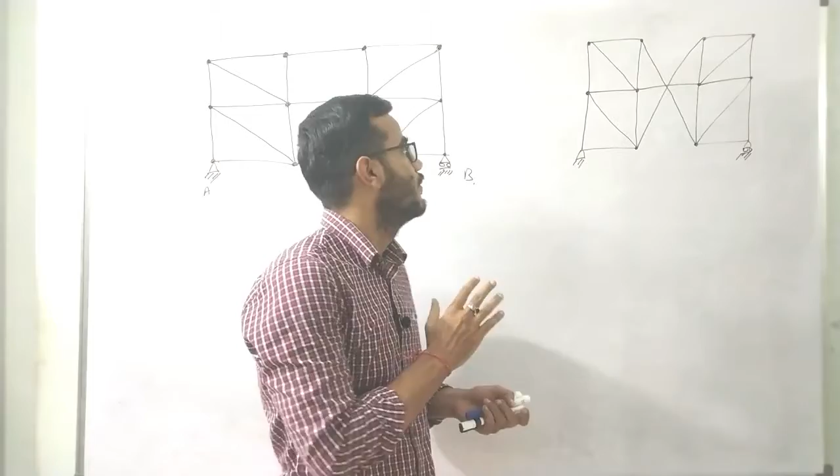So now we'll check the stability of compound frames in case of pin joint structures. Basically we have two problems here of compound frames. This is problem number one. This is problem number two. So why are we calling it a compound frame?

Here we have one pin joint frame, and here is another pin joint frame, and these are connected by simple link bars. Link bars are those bars which have pin joints at both ends. So these are only link bars. Link bars will only take the axial forces.

Similarly, here one and two are two pin jointed structure frames, which are connected again by link bars. Here we can see the three link bars which pass through the common point O. And here are the three link bars which are connected this way. In that one they are passing through the common point, but here they are not passing through the common point.

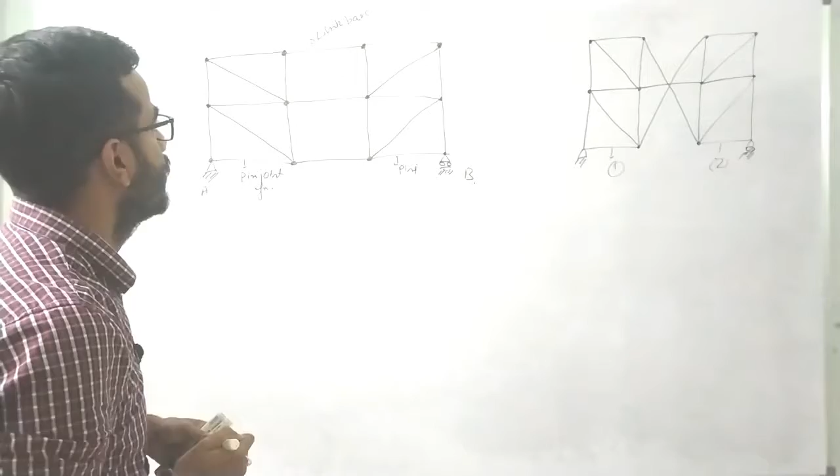So we have to check the stability of this system. To check the stability, we first have to check its external stability. In external stability, I will simply check the support reactions. Are we getting enough support reactions or not? So I'm getting one vertical, one horizontal, and here one vertical. So three reactions, and they are not concurrent.

They are non-concurrent, so they are not passing through the same point. So this is our system. So it is externally stable. Now we come to internal stability.

For internal stability, I need to check the minimum number of bars we need. For that, I have a formula which we derived earlier: 3 plus 2j minus 3. So we'll check as per this condition whether we are giving a sufficient number of bars or not. Though this is not the ultimate check. We'll see whether this check will be successful or not. So we'll calculate how many minimum bars are required.

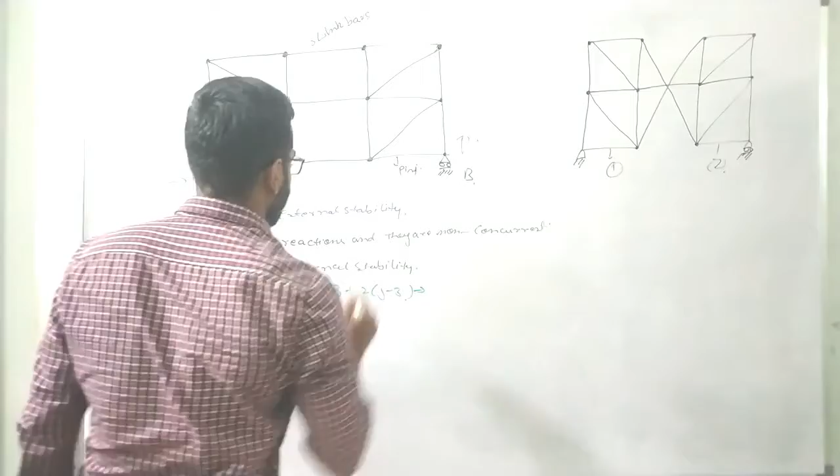First we'll calculate how many joints there are: 1, 2, 3, 4, 5, 6, 7, 8, 9, 10, 11, 12. So 12 joints are there. So 3 plus 2 into 12 minus 3, that is 3 plus 2 into 9, which equals 21. So 21 members are needed. If this should be internally stable, we need to provide minimum 21 members.

So let us count how many members we have provided in this truss system: 1, 2, 3, 4, 5, 6, 7, 8, 9, 10, 11, 12, 13, 14, 15, 16, 17, 18, 19, 20, 21. So 21 members are provided. As per this formula, this pin joint frame structure should be stable.

But it is not. Why is it not? Here we can see that sufficient members are okay because triangles are forming. In pin joint trusses we need to form triangles. But here we can see that there is no triangle formation. So we'll check this. We'll cut a section over here, where we are not getting any triangles.

So we'll draw the free body diagram of this portion. This is our support B. This is the section we have cut over there. We can see that at B there must be a vertical reaction. To counterbalance this reaction, there is no force. These are the link bars.

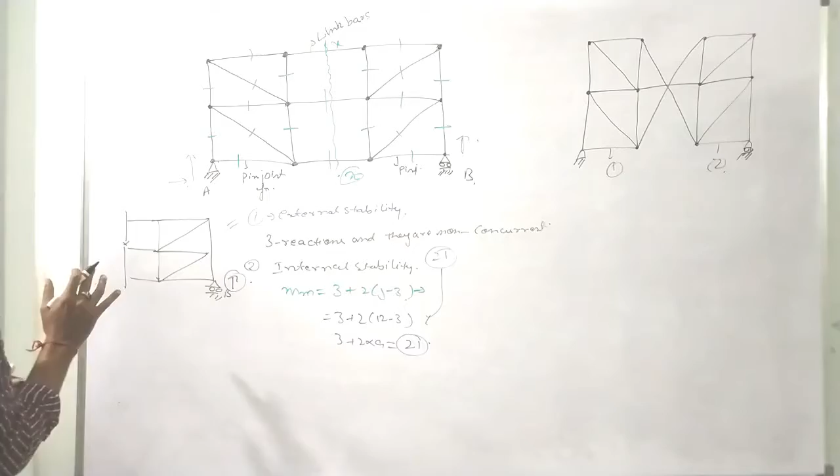Link bars will only provide axial force. They won't provide any shear force. So we can say that this portion won't be able to resist any shear. That means it can deflect like this, something like this.

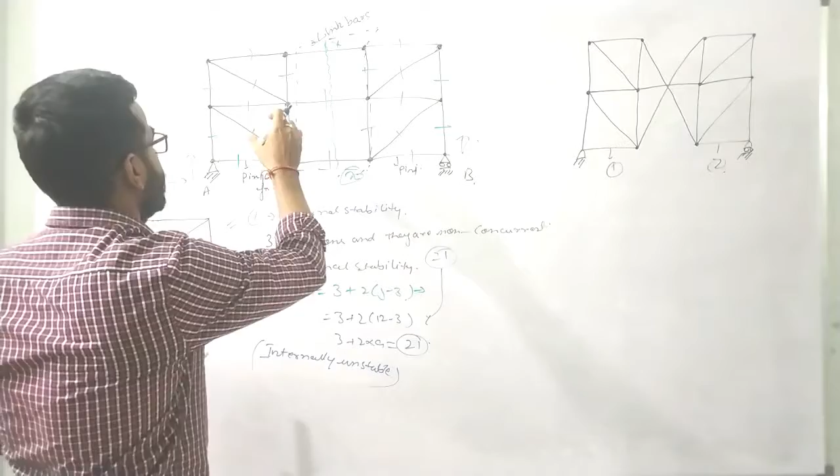Okay, so this portion is internally unstable. So due to this portion, this system is internally unstable. Okay, so this is internally unstable. But from the formula we are getting stable. But if we see how the members are positioned, from that we can say that this member is internally unstable.

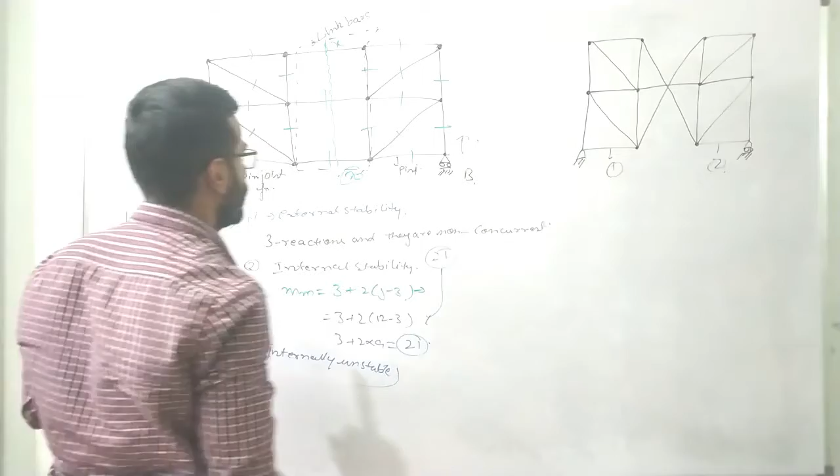Okay, so this thing you have to remember: where the triangles are not forming, we simply cut the section over there and see whether this section is able to resist this vertical force or not. Okay, so this is externally stable and internally unstable.

Okay, now we'll come to this problem. In this problem, we'll see the same: vertical reaction is there, horizontal reaction is there, similarly vertical reaction. So it is externally stable, because three reactions plus non-concurrent. Now we'll check the internal stability. First we'll calculate how many minimum members are required with this formula: 3 plus 2 into j minus 3. So how many joints are there?

1, 2, 3, 4, 5, 6, 7, 8, 9, 10, 11, 12. Okay, 12 joints. This is not a joint, this is overlapping. So this is not a joint. 1 through 12. So m equals 3 plus 2 into 12 minus 3, which equals 21.

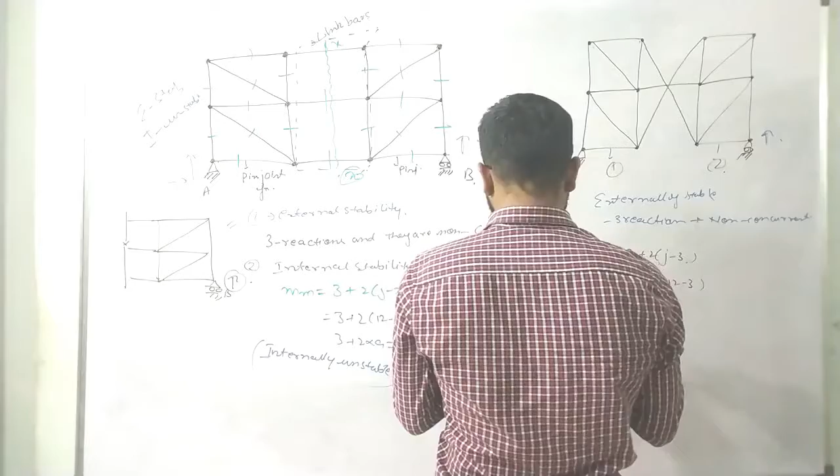So how many members have we provided? 1, 2, 3, 4, 5, 6, 7, 8, 9, 10, 11, 12, 13, 14, 15, 16, 17, 18, 19, 20, 21. Again it is coming out 21. So as per formula, this is coming out to be internally stable. But if we analyze this by cutting this section, we'll find that this is not internally stable.

How can we do that? Suppose this is a common point O. This point O is not a joint. At this point these three link bars are overlapping; they are meeting at this common point. So I'll simply cut a section from here.

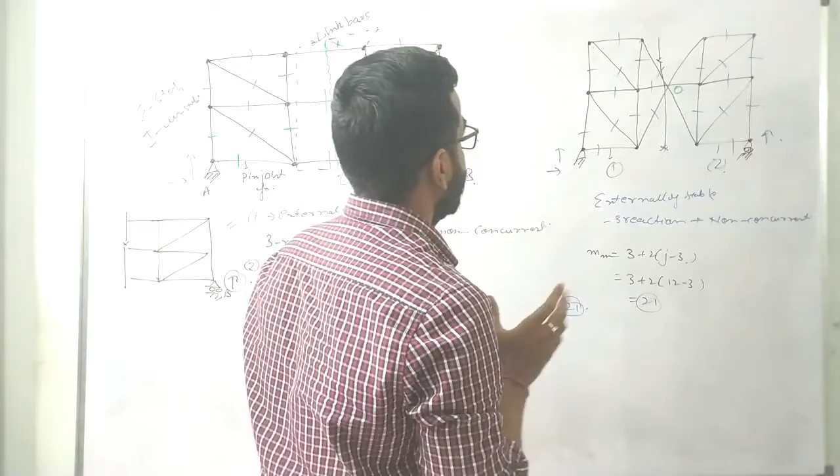Now my diagram will look like this. Okay, so I'll find the moment about this point O. If I find the moment about point O, at B there must be a reaction RB which is non-zero.

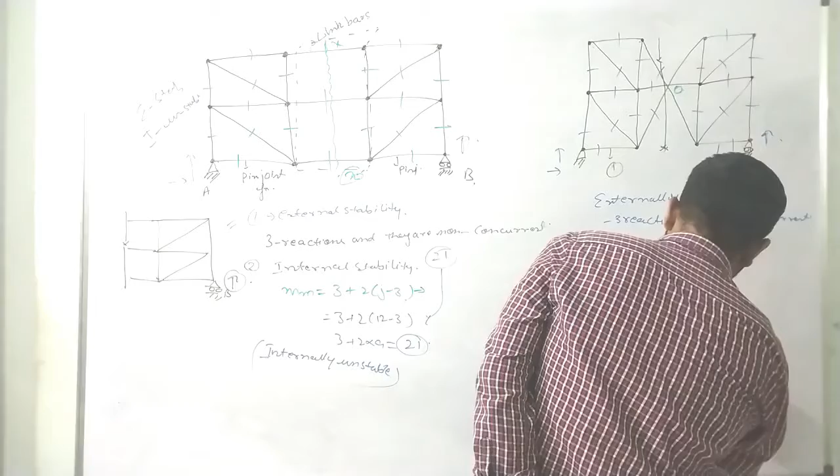If I calculate the moment about point O, the forces in the link bars pass through the same common point O, so the link bars will not provide any moment about point O, because they are passing through point O. So at point O, summation M equals RB into L plus L by 2.

So at point O we are getting some moment. That should not be there, because it is not in equilibrium about this point. So since these members pass through the common point O, this is not stable. This should come out to be zero, but this is not the case. So about point O, this is internally unstable.

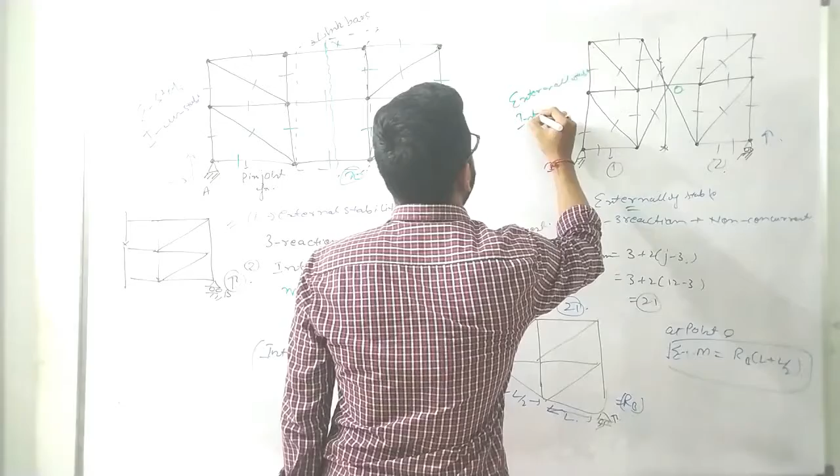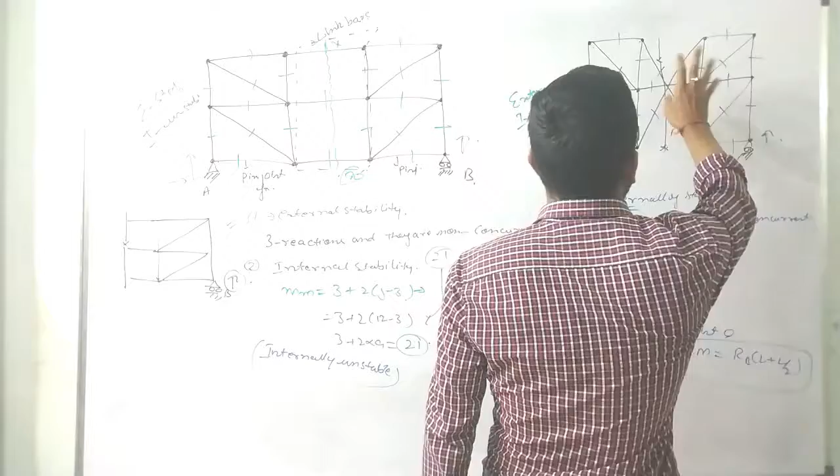Okay, so this frame is also externally stable, internally unstable. So this is the problem based on the compound frame, and this is the way you have to proceed with different types of pin-jointed frames. You just need to cut the section where there is no triangle formation, where members pass through a common point. These are all the internally unstable type. So through this we can approach these compound frame problems.